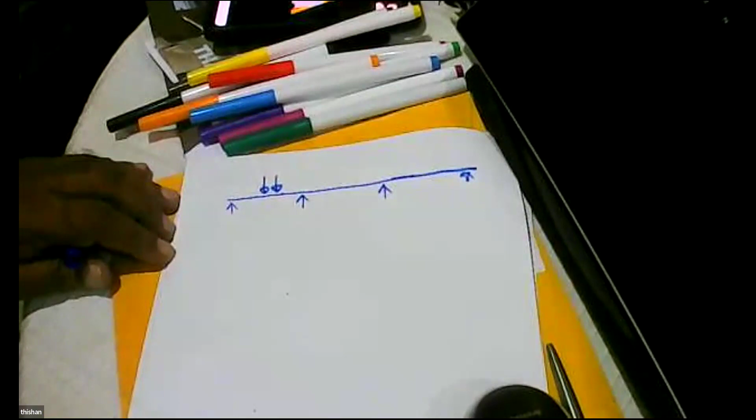So, direct shear. First question: why do you get direct shear? We have a member, a beam, subjected to two loads, W1 and W2, applied here. Where are we resisting? At supports A, B, C, and D - that's where we are resisting. So if you are applying a load here and resisting here, there should be shear. Call it shear.

So whether it's a UDL - you have a UDL - we must have the bending moment diagram. Whenever there is bending, what is the next thing that happens? We will have shear. And the shear force diagram goes like this.

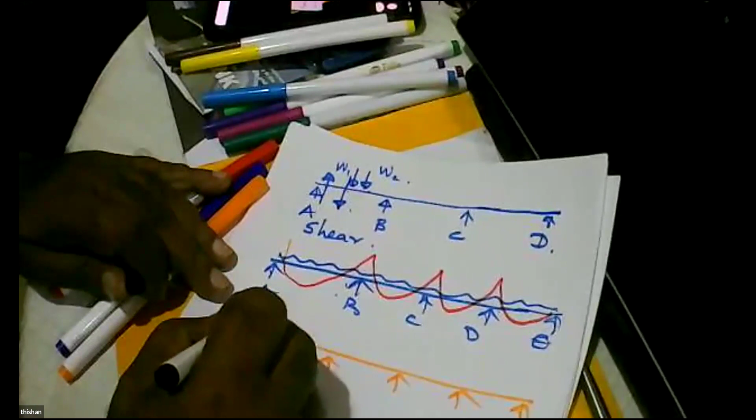And we approximately say the shear here cannot exceed 0.6 times F, where F is equal to L times 1.35 gk plus 1.5 qk - so the total load on a beam. It's so easy, you don't do any calculation - just calculate the total load on a beam.

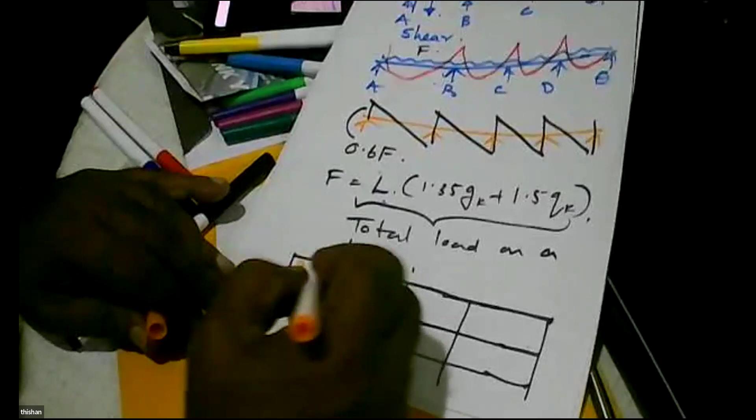If you have a building having a grid like this, and these are one-way slabs, where the load goes - this way, this is a plan view. So these are columns.

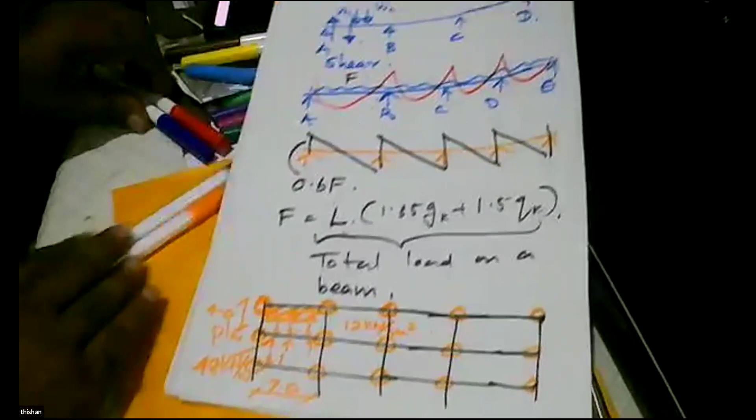So you know the load. If it's an office building, we say it's 12 kilonewtons per meter squared, and if this span is 4 meters, then 12 into 4. So this will be subjected to 48 kilonewtons per meter, multiplied by these spans which are 7.0 meters. So straight away we can see what's going on - we'll have a beam subjected to a load of 48 kilonewtons per meter. And what is the shear? Shear will be 0.6 times 48 multiplied by 7.0. Straight away we know the shear.

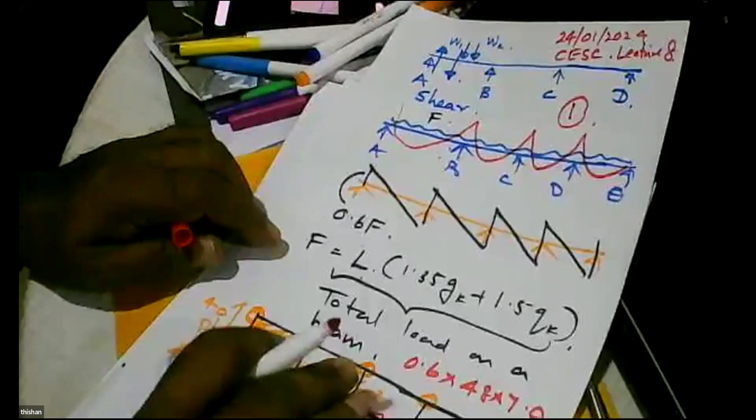So in British code, the approach was simple. Today is 24th January 2024, Civil Engineering Sectional Committee, lecture number 8, and this is page 1. This is clear - why it's 0.6? It cannot exceed 0.6, so we know the maximum. We know the load, we know the maximum. But this here comes where?

It comes at the support, where the support can be a 500 by 700 column. So in the British code, we drew it like this.

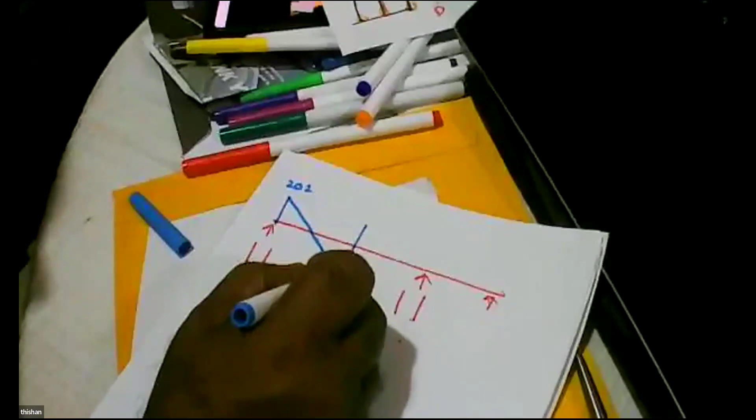So what is the value, Bandhuka? 0.6 multiplied by 48 multiplied by 7? 201.6 - 202, we say 202. So we say this is 202. Again, we go like this. Then there are two important sections - let's say we are using a 600 by 400 beam.

So there are two important sections. One is the face of the support. The other is d, simple d, away from the face of the support, so 545 millimeters away from the face of the support. So if I do an exaggerated diagram, a larger diagram.

So this is 250, this is 545, because here the d is 545. You know the reason, the cover is 35 millimeters. So we have this, so this is the face of the support. This d, away from the support.

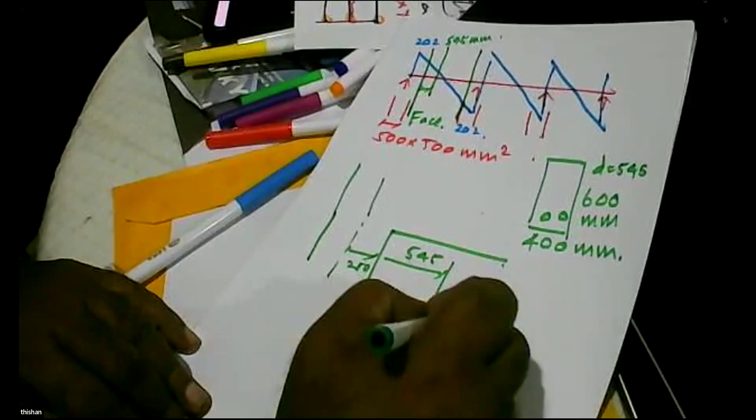Face of the support - why are these two so important? The reason is, if you take a section of a simply supported beam, this is the bending moment diagram, this is the shear force diagram. When the bending moment is 0, shear force is maximum. So if you take an element here, what do you get?

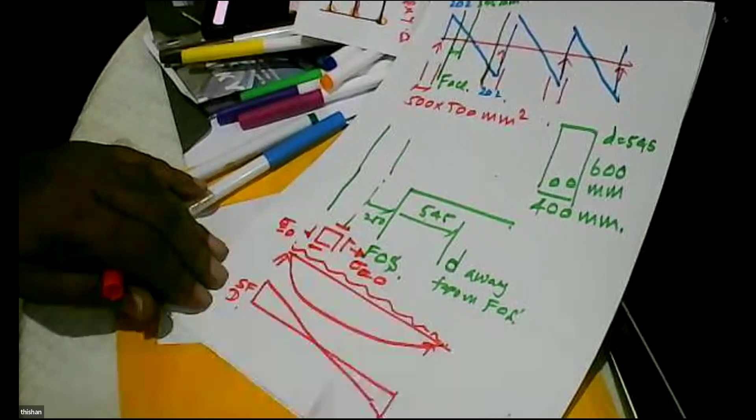Only the shear, complementary shear. Stress, sigma 0. So you can draw a Mohr's circle: 0, tau, minus tau, 0, tau.

And you find the principal stresses are like this: tension, compression. So what is the failure type? It's shear.

What is the shear failure? A crack like this, where the tension is pulling it, pulling it that way. So shear failure is a tensile failure, because this maximum stress that you get in the Mohr's circle will cause the shear failure, and it's a tensile failure.

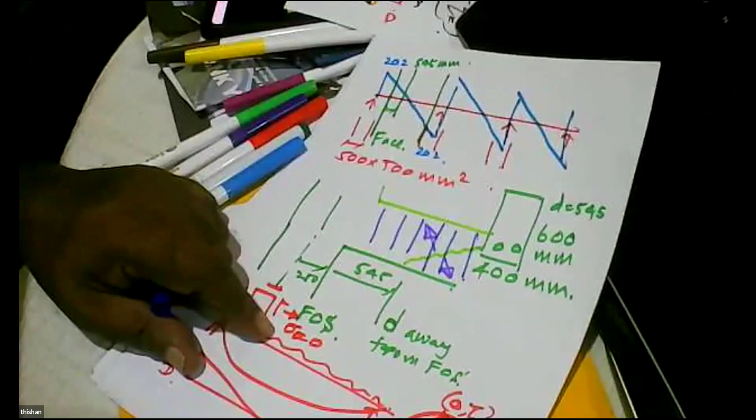So it's tension. So how to prevent this? Links like this. So tension is taken by whom now? Tension is taken by the links. So we provide links, and shear failure can be prevented. Shear failure is a tensile failure, and tensile failure means we have to prevent it using vertical reinforcement.

Vertical reinforcement should be properly anchored. So what we say is vertical reinforcement should be in the form of links like this - vertical reinforcement should be links, closed links, or this shape.

But we can have a closure. This is also possible, this is also possible, this is also possible. But this is called a torsional link. These are called shear links.

What is not possible? This is not wrong, but the new link bending machines, they give you this. So you can buy this, but ask a man to bend like this and make it like that.

And I generally keep this length as 10 times diameter of the link, because I would like to link it. So generally what you need is 6 times diameter, but generally I keep about 10 times diameter and bend. Is that clear? Yes, clear sir, very clear.

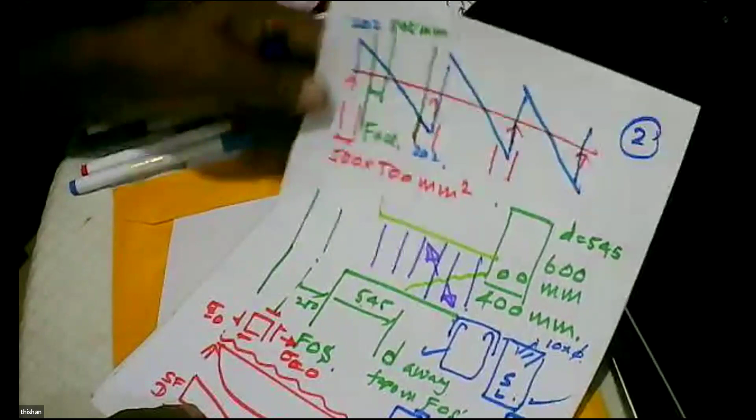Right, so that is shear, and we know the magnitude. And we can have two types of shear. One is you have a beam, no reinforcement, just these bars, no links.

Then who will carry tension? Concrete has to carry tension. How do you rank concrete - strong in tension or weak in tension? Very weak in tension. So all these capacities will depend on the dowel action provided by these reinforcements, so it's a function of 100 As over bd. The dowel action - more reinforcement, bigger the shear strength.

And then what else? Grade of concrete. Grade of concrete, and then the tensile strength. Generally this value is between 0.4 to 0.7 megapascal.

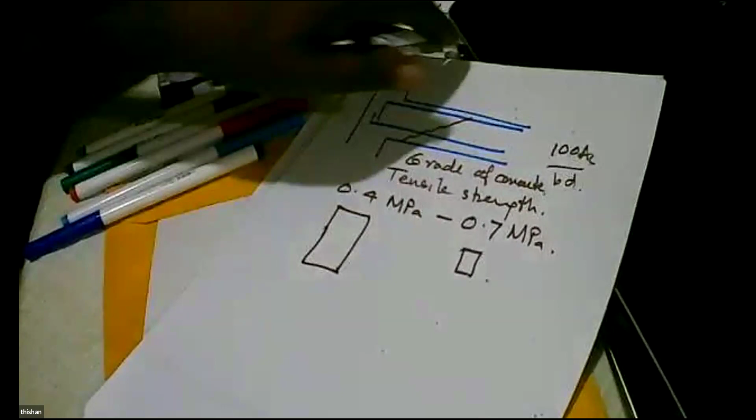So bigger the section, this side - big section, small section, this side. Bigger the depth, close to 0.4. So for most of my calculations, I don't bother to check the value, I simply use a value of 0.4, 0.45, not more than that, because the variation is so small to get any advantage. Most of the time you check the code and finally find 0.4 to 0.45 is the value that you get after calculation. So I just generally use 0.4.

So you have this situation, and then you can see we have links, properly reinforced links. What happens? We can have this compression here, this tension, this tension.

Who will provide the equilibrium? Compression. Who will carry the compression? Compression will be like this, carried by whom? Concrete.

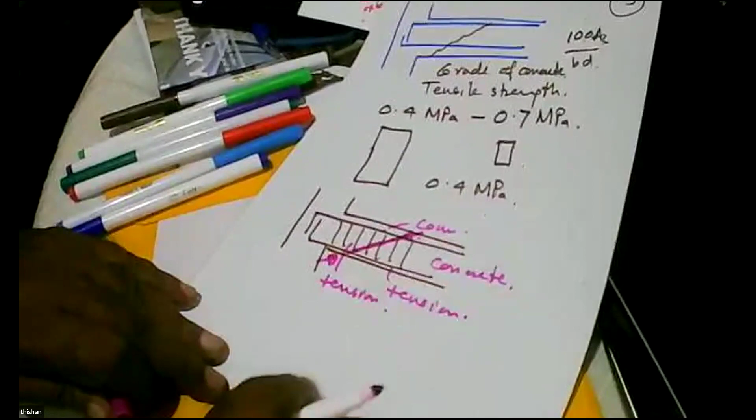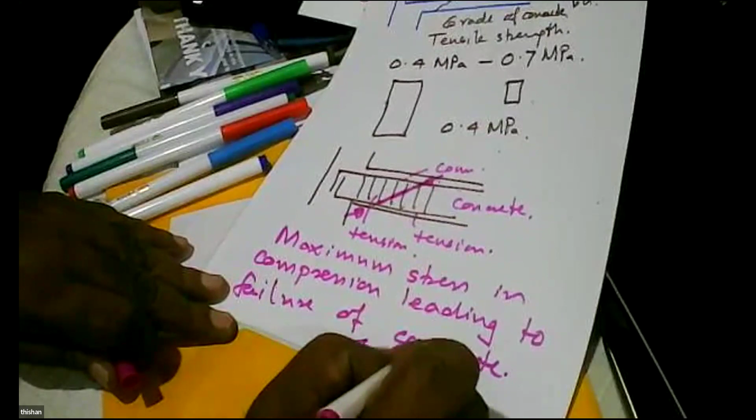But concrete is a very strong material, but it is not super strong, so there is a maximum value of stress in compression leading to failure of concrete. It's a maximum value, it's about 4.8 megapascal in BS 8110.

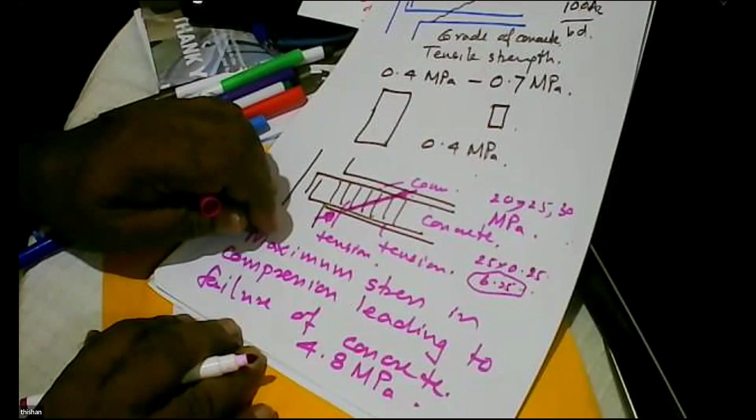Maximum is about 4.8 megapascal. Why? We use 20, 25, 30 megapascal cube strength, and the maximum stress that we can allow in compression induced by shear is only about 4, because if you use about 5, 25 into something like 0.25 comes to about 6.25. So with all these additional factors of safety, we say okay, we can allow a maximum value of 4.8, because when you use 25 cube strength, the actual strength is 20, 20 multiplied by 0.25 is 5.

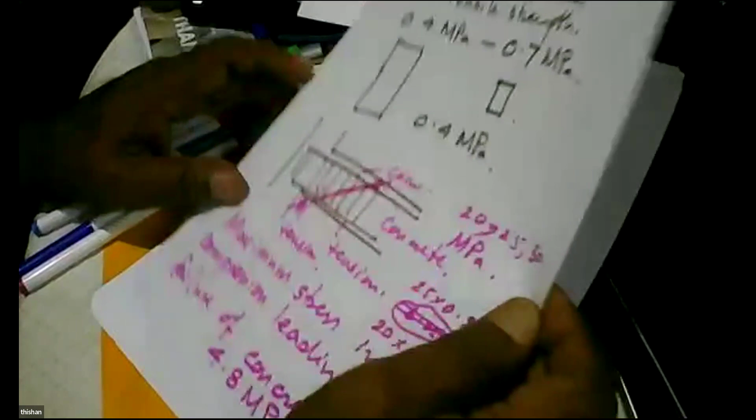So you can see generally the values vary between 4.8 to 5.3, so it's a very small variation. So generally I have a rule: maximum shear capacity is 5 MPa. If the maximum shear capacity is 5, minimum is 0.4, what shall I do? I generally select the section.

Shear, maximum shear at the support. So here is 202. Is that right, Bandhuga? 202. Yes, sir. 202.

Now I have to draw a diagram. So this is 7,000 center to center. Face of the support, 6,500.

So I have to say 3,250 divided by 3,500 multiplied by 202. What is the value, Bandhuga? 180. What is the value? 187.5. 188.

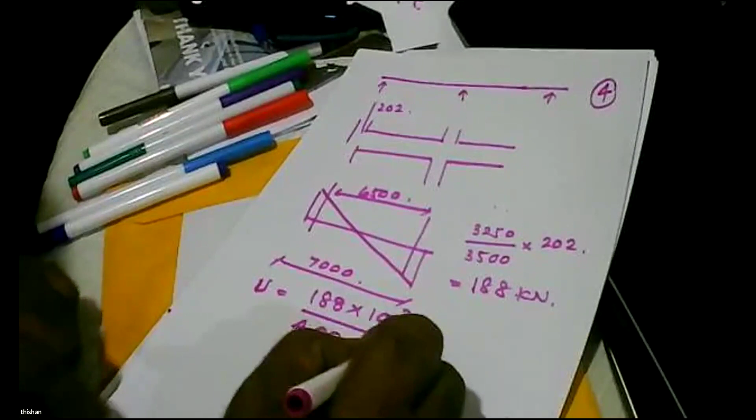Now what do I do? 188. Simple, V is equal to 188 multiplied by 10 to the power 3 divided by width 400. Let's calculate, start with 600 by 400 section. Yes, 600 by 400. Okay. 600 by 400 section. What is the value?

This is the shear stress, average shear stress. 0.862. 0.87. Okay. What is the maximum? Close to 5. Minimum is about 0.4. This is 0.87.

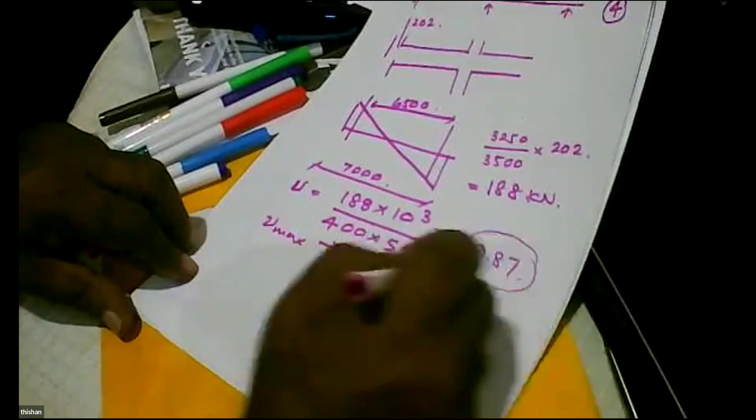How to provide links? Links are not provided here. We are going to check whether it can fail in crushing of concrete. So, stress is 0.87. What is the maximum? 5. Can it fail by crushing of concrete? No, it cannot fail by crushing of concrete. Why? Maximum is around 5. But at the face of the support, maximum shear is 0.87. Can it ever fail by crushing of concrete? Never.

Now we come to the next phase. Now for this, I'll say the effective depth is 550. So here we have 250, another 550, so that gives 800. Then I'll say V is equal to 100, 202 multiplied by 2,700 or 3,500 minus 800 divided by 3,500. What is the value, Bandhuga?

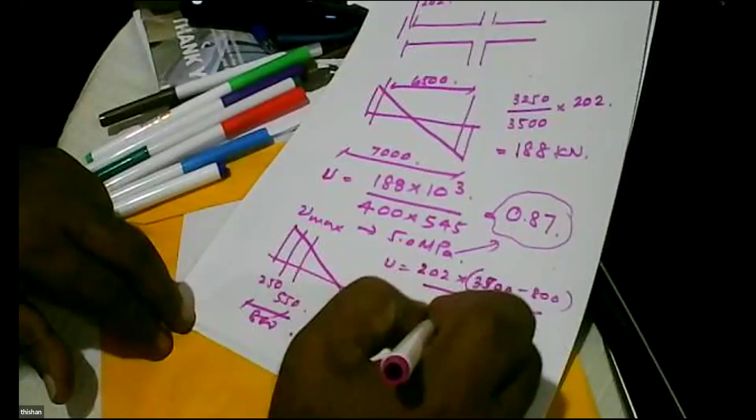155.82, 56. So yes, simple V is equal to 156 into 10 to the power 3 divided by 400 multiplied by 545. 0.715, 7.

Then we look at the BS formula. It says ASV over SV B, V minus VC, 0.87. Yeah, very simple. Okay, very simple.

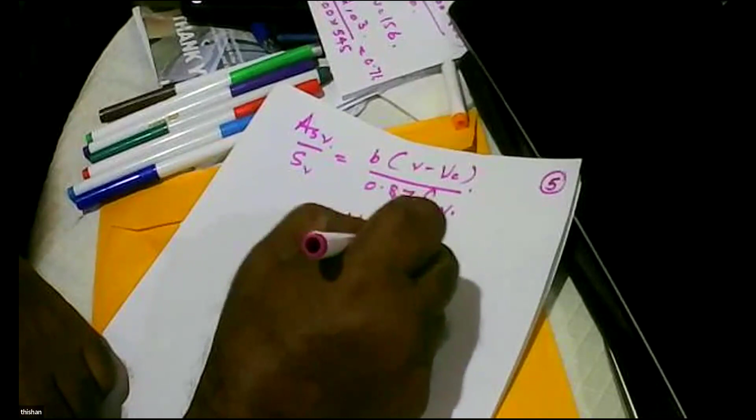Now, what would I do? Now you can see here we have a term called V minus VC. Now if V is 0.45, VC is also 0.45, what do you get? 0. Then you get infinity. That is not good, you can't get infinity for the link spacing. Because this is 0, it goes there, you get SV as infinity. Can't be. So then it says V minus VC should be greater than 0.4.

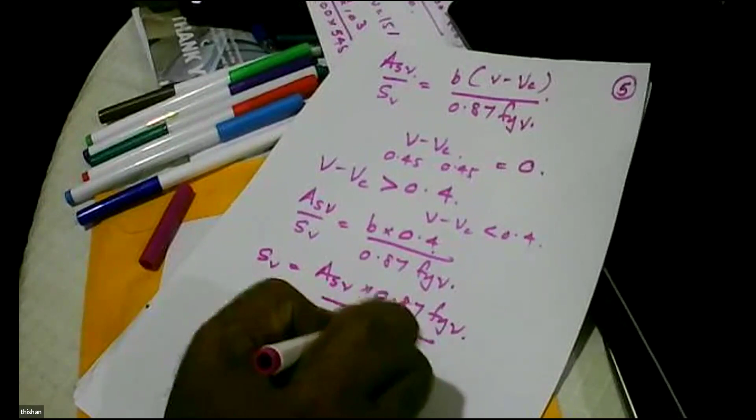So anything less, if V minus VC is less than 0.4, we say ASV over SV is equal to B times 0.4 divided by 0.87. And we call this spacing SV is equal to ASV times 0.87 FYV divided by 0.4 times B. And in this equation, ASV means if you are using 8 millimeter bars, 50 here, 50 here, ASV means 100 millimeters square. Got it? Yes, sir.

But ASV is known, SV is equal to 100, 0.87 into 500, divided by 0.4 multiplied by breadth. What is the answer? 271.87, 200? 271.8, 200. 271.8.

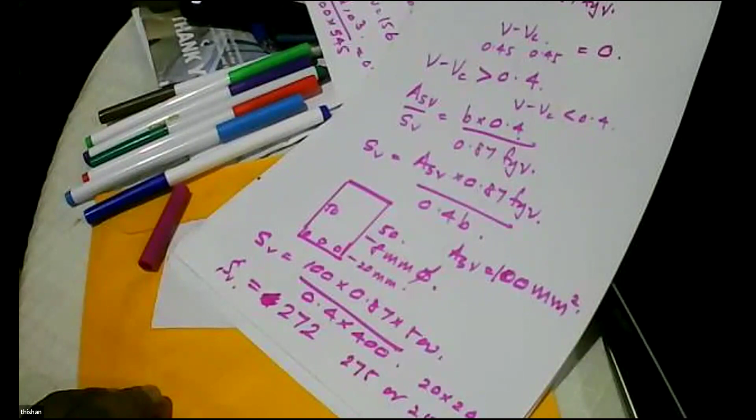And if you are using 20 millimeter bars here, Eurocode allows you to use 20 times 20, 400 millimeters. But you can't go for 400. So you might select 275 or 250 for the next. I would select 250. Why? Because I would like to have little extra reinforcement to assure that overloading can be tolerated easily. Why? I like a failure in flexure. I don't like a failure in shear.

What is the reason? If a beam fails in flexure, what can you do? You can bring a steel plate and fix the steel plate at the bottom of the beam. Now the beam will be okay after jacking the beam. On the other hand, after jacking the beam, you will use FRP treatment, fiber reinforced polymers, carbon fibers. What will happen? Beam will be okay. But if there's a shear failure with diagonal cracks, very difficult to repair. So because of that reason, I don't mind being a little generous with shear links close to the supports, not elsewhere.

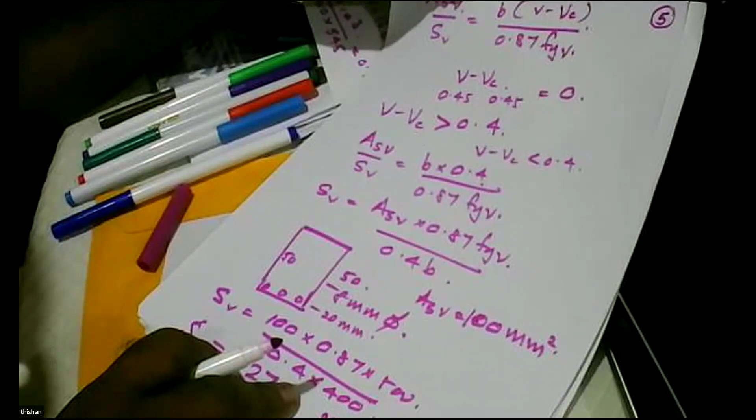Now let's assume that beam has been overloaded by somebody and we are getting a load of 312. Now what is V? 312 into 10 to the power 3 divided by breadth 400 divided by depth 700, 545, and you got the answer will be 1.42. Is that right, Badhuga? Yes, sir. 1.4. Now we have to substitute.

Why? In the first equation, ASV over SV is equal to V minus VC over 0.87 fyv. And now ASV is 100, SV breadth 400, V minus VC.

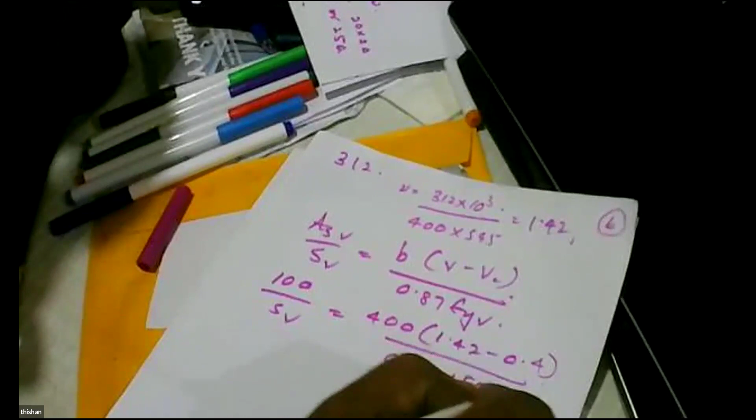So which means it's better to use 10 millimeter H10 bars, and for H10 the spacing will be 61 into 50, 78.5. For H10 bars the spacing will be more. So how much do you get? 150? 167.3.

So what are you going to do? We're going to do this. We are going to calculate small v as 0.4. Capital V is equal to 0.4 multiplied by how much? 400 multiplied by 545. What is the value of V?

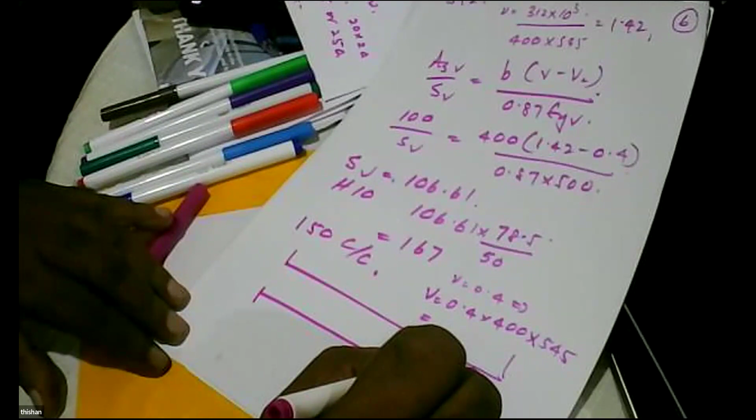So this is what the nominal reinforcement can carry. How much is it? 0.4 into 400 multiplied by 545, into 10 to the power minus 3. How much? 87.2, 80? 7.2. 80.

And then there will be another section where it's 87.2. So what are you going to provide? Here, H10 at 150. Here, H8 at 250.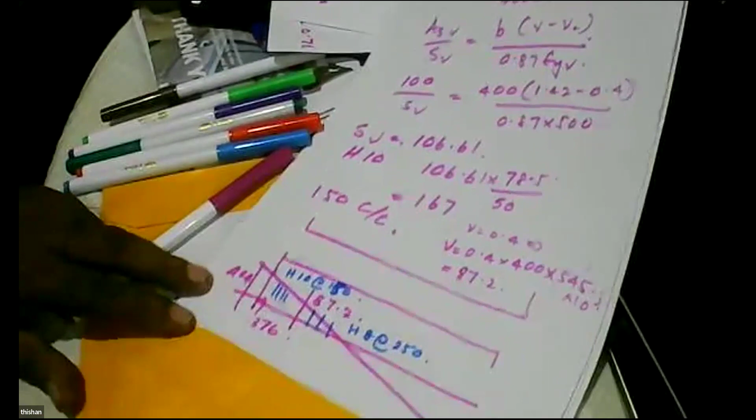So you can decide where you are going to provide nominal links, where you are going to provide design links. So here, design. Here, nominal. Is that clear, Manduga? Yes, clear, sir. When the shear force is low, we can go for nominal links. When the shear force is high, we must design the links.

So in BS 8110 method, we say we are using a truss analogy. Truss analogy. What is a truss? Beam is like a truss. So what is the purpose of this? Compression along with concrete. What is the purpose of this? Tension. Like a truss. But truss cannot be like this.

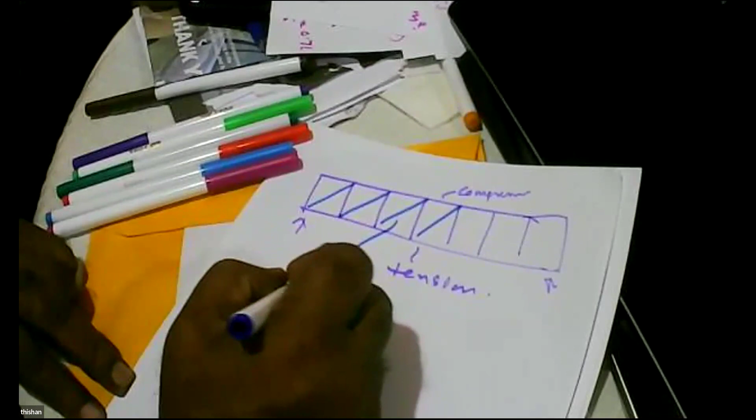You need diagonal members. So what are the diagonal members? Compression. Concrete. So in reinforced concrete, the diagonal members are out of concrete. Is that clear, Bandhu? Yes, clear, sir.

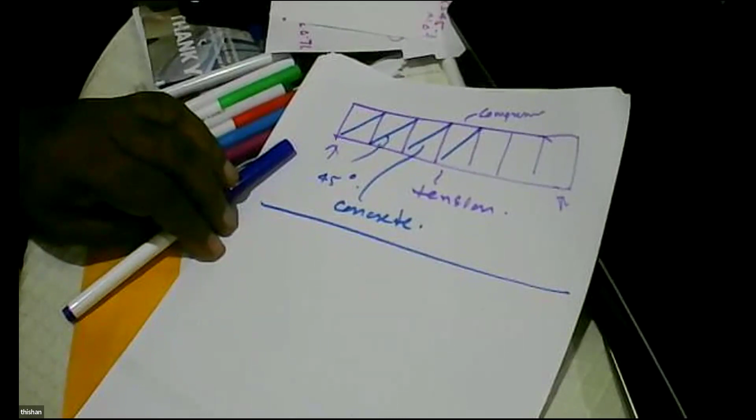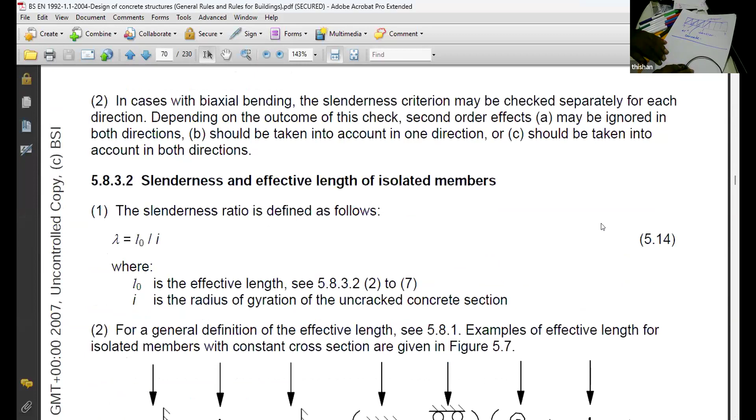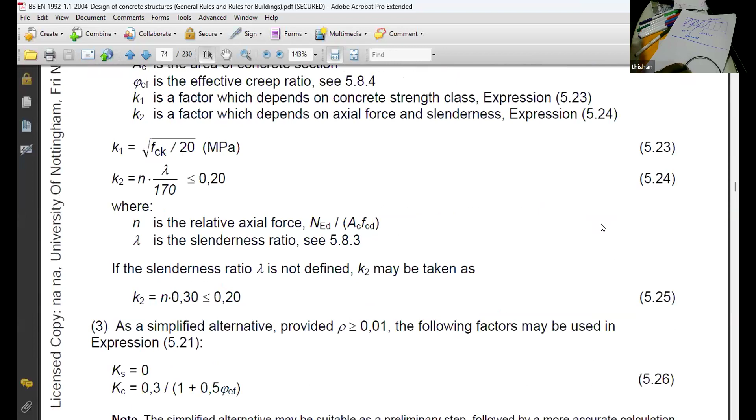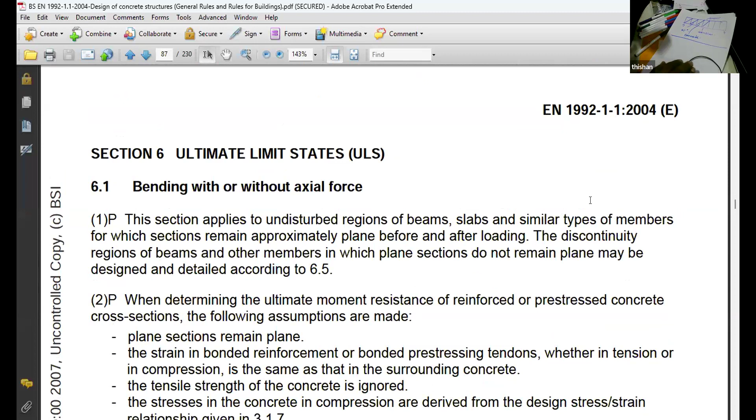Okay, now we come to the design. Under section 6, bending with or without axial force. The assumptions are plane sections remain plane. The strain in bonded reinforcement, whether in tension or compression, is the same. Tensile strength of concrete is ignored. Stresses in concrete in compression are derived from the stress strain relationship.

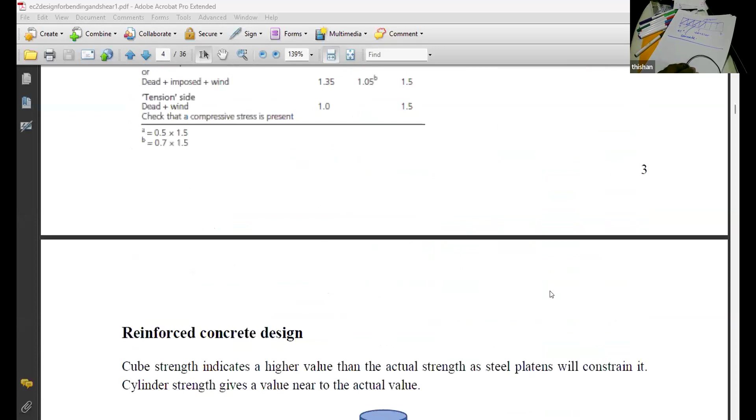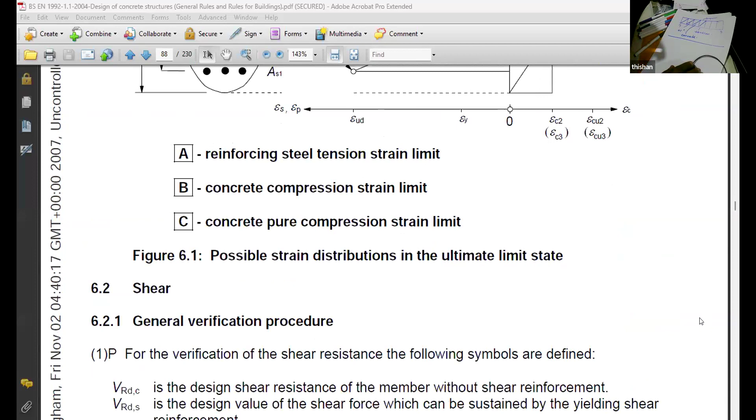And then it says shear. Flexure is very simple, but it doesn't give equations. So for flexure, we have derived equations. That's what we did last time. When I said no need for equations, shortcut methods are available. Also available.

Then this talks about VRDC, the design shear resistance of a member without shear reinforcement, based on the 0.4, 0.45 value. VRDS is the design value of shear force which can be sustained by yielding shear reinforcement. That means VRDS is with shear reinforcement. VRD max, can you remember I told you 4.5 to 5 range? Yes. VRD max is 4.5 to 5 range. This is what you get when you have reinforcement. And this inclined portion is for pre-stress concrete, so you don't have to worry.

VCCD and VTD are pre-stress concrete terms, so you don't have to worry about them because we are dealing with RC design. So for RC design, the shear member reinforcement VRD is equal to VRDS only.

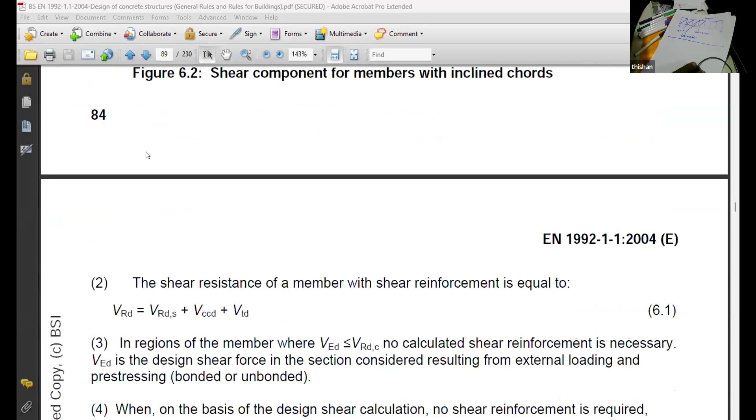And if the regions, VRDC, what is VRDC? That is the shear resistance of a member without shear reinforcement. Can you remember? I calculated the nominal link area. That refers to nominal link area. So VRDC is for nominal links.

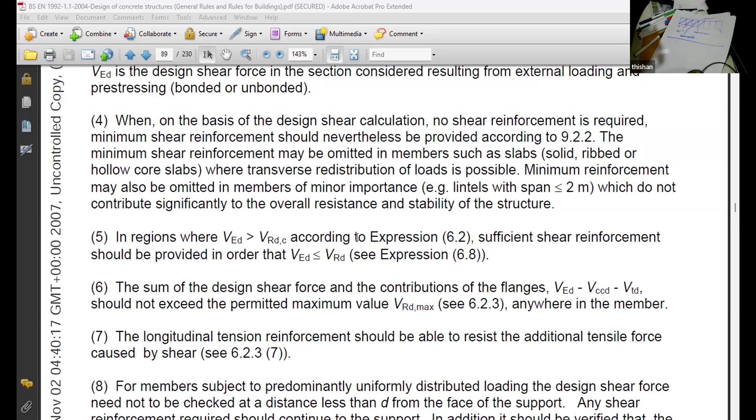Then it says when no shear reinforcement is needed, still you have to provide the minimum shear reinforcement. That is given in section 9, where all minimum values are given. In regions where VED, the actual design shear force, is more than what can be carried without links, then you must provide shear links. To calculate VRDC, it gives an equation with a minimum value.

There are big equations, but what is the value you get finally? Around 0.4 or 0.45 times the cross section. All these are big calculations, but the important thing is if you have pre-stress, you can get a higher value. So in this equation, one part is the pre-stress part, and the other is the RC part. The RC part comes first, the pre-stress concrete part comes next.

Is that clear? Yes. But whatever you do, what is the answer? Around 0.4. So you can do any calculation, but the answer is around 0.4. That's how you create rules. The moment you do that, your calculations become very simple, because there's a big equation given, but the answer is around 0.4.

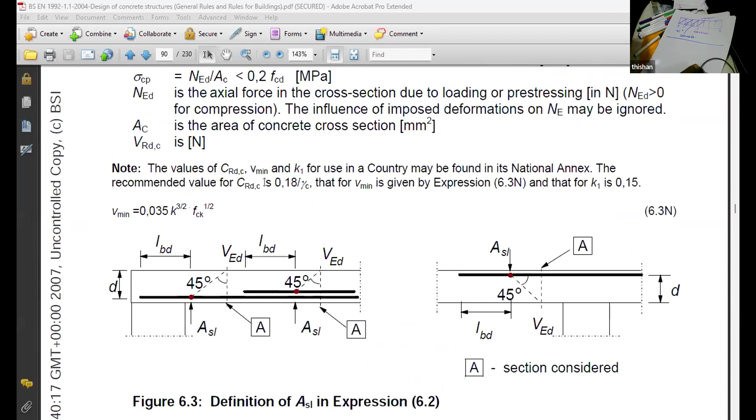Then there are so many other things. This is a pre-stress rule, so we ignore it. Then there are other parameters. Doing all the complicated things, finally it says, if you want reinforcement, the reinforcement requirement is given by...

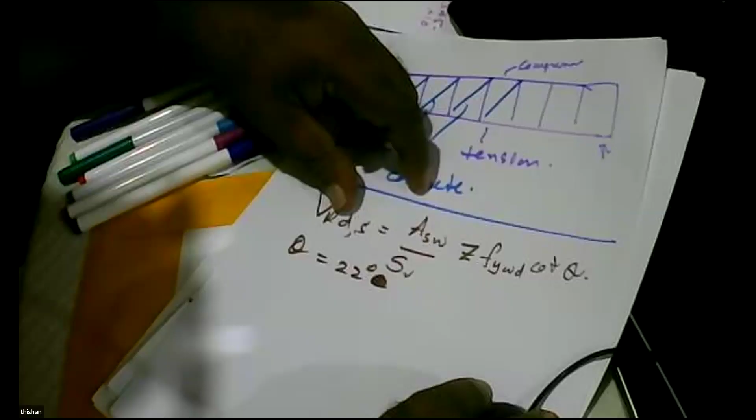VRDS with shear links is ASW over SV, Z, FYWD, cot theta, where theta is 22 degrees. Cot theta, can you see this equation? Cot 22 is equal to 1 over tan 22. What is the value of 1 over tan 22? It's 2.47, so generally it's called 2.5.

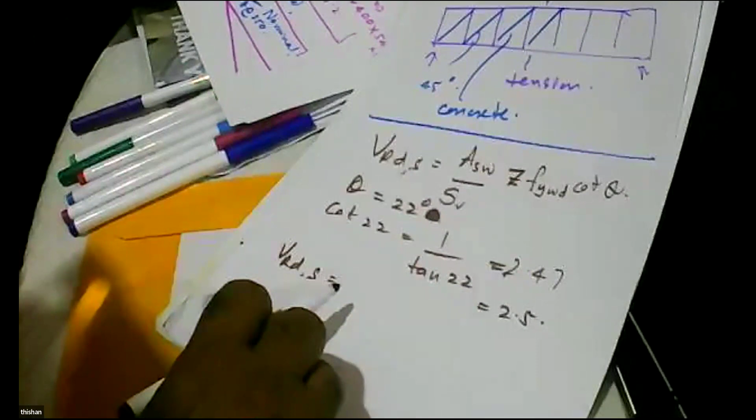So VRDS is equal to ASW. Shall we use the value we got? What value did we use in the last example? We used VS 312, so let's say this 312 into 10 to the power 3. ASW is 78.5 into 2, 157, SV - we don't know, we'd like to find it.

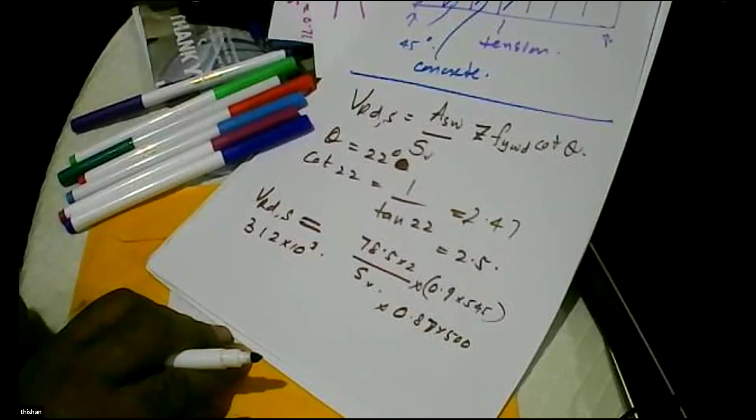Is it 0.9 times D? If you see Z in any equation, Z means lever arm. Lever arm is considered as 0.9 for shear calculation, multiplied by 0.87 multiplied by 500 multiplied by 2.5. But then what is the SV value? These 157 multiplied by 0.9 multiplied by 545 multiplied by 0.87 multiplied by 500 multiplied by 2.5, divided by 312 into 10 to the power 3.

What is SV? 268.41. Can you remember British code gave a lower value? Yes, British code gave 150, 167. This gives slightly higher, so Eurocode is more advanced in shear design. But in Eurocode also we have only one equation.

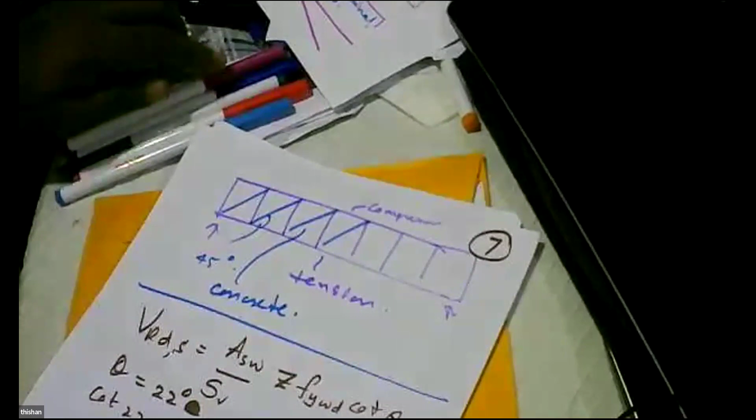And that equation is given in the code. Then you've got to ask, what is this theta? What is this magic theta? How do you get theta? That's where the complication is, otherwise finding the shear reinforcement using Eurocode needs only one equation - equation 6-8. Straight away you can find it. Very easy.

So many people say shear design is a nightmare. No, it's not a nightmare. Then what is the speciality? What is this theta? That's where the complication comes. It says when the concrete fails in crushing at the face of the support, theta can be less than 22 degrees or theta can be between 22 and 45.

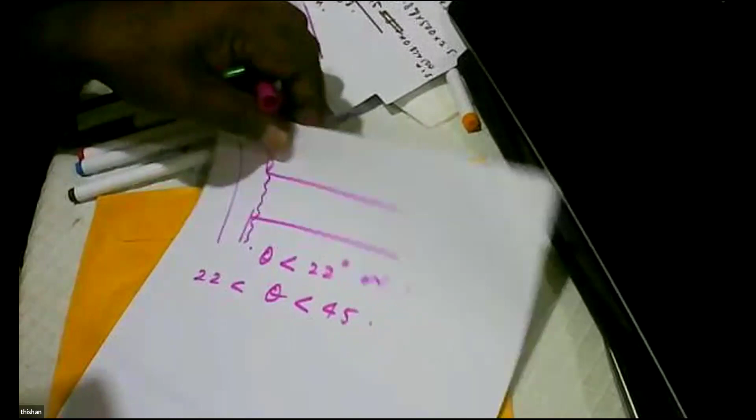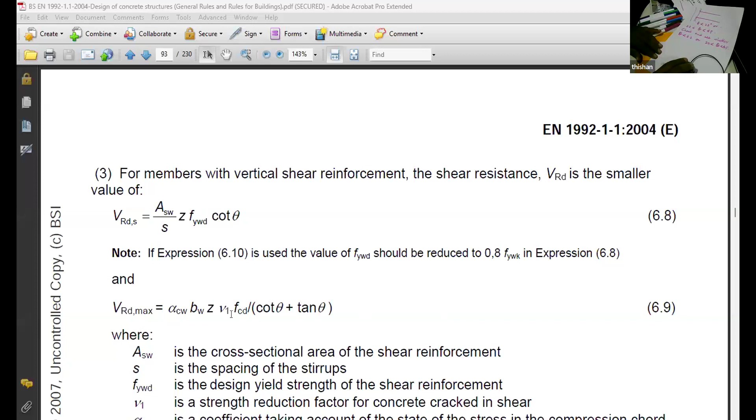What it says is, check and see whether theta is less than 22 or theta is between those values. How do you achieve that check? For that we look at the code. This says VRD max is given by some equation, equation 6.9, and it's a big equation.

Alpha CW, BW, Z, nu one, FCD divided by cot theta plus tan theta. A big equation.

The big equation. So, how are we going to deal with it? First, assume theta is 22.

Substitute in this one, and alpha CD, alpha CW is equal to 1 for non-prestressed concrete structure. Alpha CW is 1, okay, good news. Alpha CW is 1. BW, we know 400. Is it 0.9D?

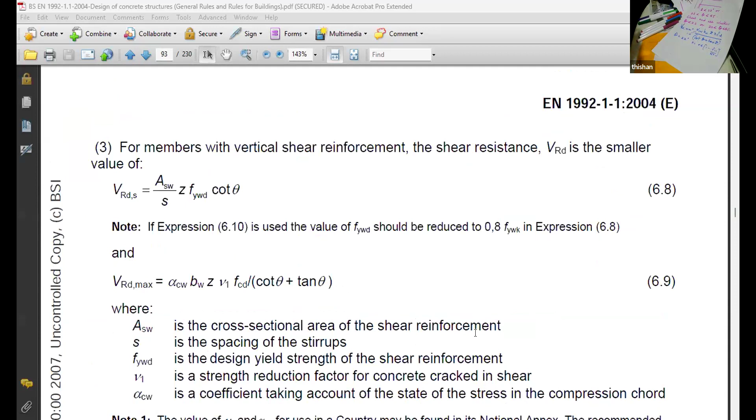The strength reduction factor for concrete cracked in shear is given by this equation, the equation I have shown. FCD is FCK divided by gamma m, or FCK divided by 1.5.

So now you can see the whole equation is here, the values are here. What shall we do? Substitute. VR max with angle as 22, 1.0 into 400, into 0.9D, 545,

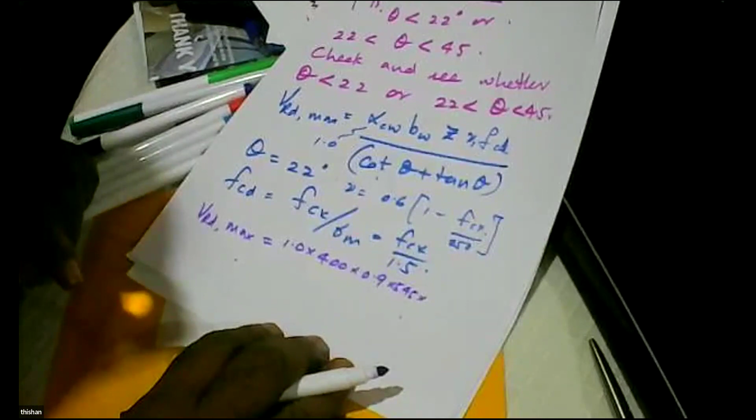multiplied by nu one. So that is, we are using 30 megapascal concrete. So this comes to about 0.53. This 30 divided by 250, so it comes to about 0.88 multiplied by 0.6, about 0.53.

And 1 over tan 22 plus tan 22. 1 over tan 22 is about 2.5, 2.47. Tan 22 comes to about 0.4, I think.

So what is VRD maximum, Bandhu? What is VRD max? Multiplied by 10 to the minus 3. So what is the value? 36.117. Can't be, it has to be more. It has to be something like 400, 500. It's a big value.

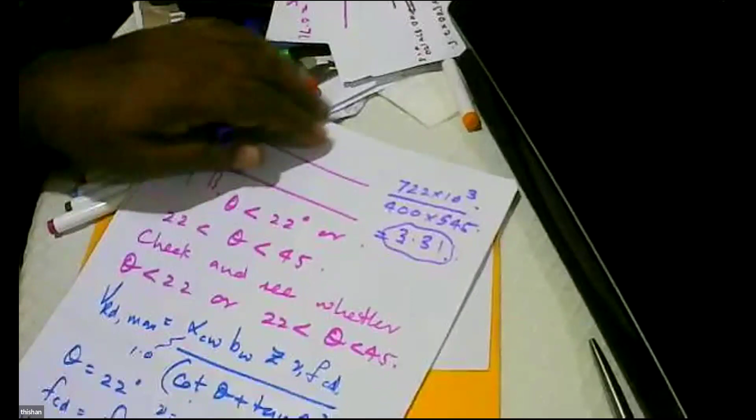Can you remember the magic number? 5, 4.8 and 5. So what it says is, if the shear stress is 3.31, angle is 22. If it is close to 5, 3.31... if it is close to 5, what is the angle? 45.

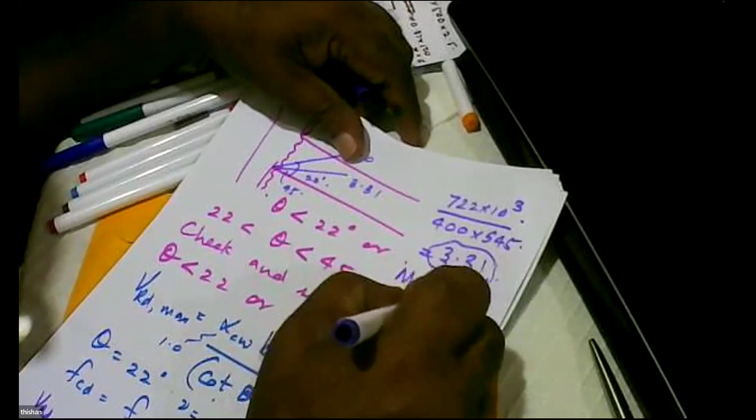So how can I avoid all these extra calculations of finding the angle of shear failure? What I do is, I make sure the maximum shear is less than 2.5. So how can I control the maximum shear stress? Because I am the guy who selects the width of the beam. So if the shear stress is too high, I increase the width of the beam. And I keep the maximum shear less than 2.5. So do I worry about the angle then? Angle is always 22. Got the point?

Now if the angle is more than 22, that means if the shear is more than around 900, 850 or 900, what will happen? Angle will be more than 22. Because I am moving, it can vary between 3.31 and around 5. The shear stress maximum can vary between 3.31 and 5. So what shall I do? I will keep the maximum shear stress less than 2.5. Then what will happen? I don't have to do any calculation because the angle is 22 anyway.

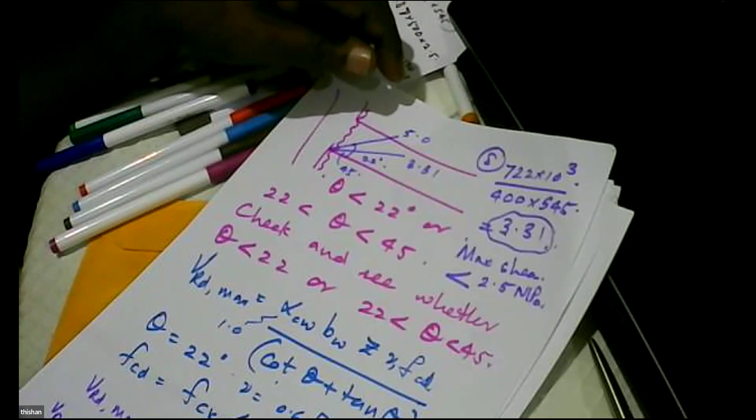Got the point, Bandhu? Yes, sir. Because if the shear is high, I have to find the angle. Why should I bother to find the angle? Because I am in control, I am the guy who selects the width of the beam. So I select a bigger width and keep the shear stress down. Can you understand it? Yes, sir.

So when I'm selecting the general arrangement drawing, how could I do that? Okay, I have a building heavily loaded. Say we said 1.35 GK plus 1.5 QK is around 20, a warehouse. And these beams are also, let's say, one way, 9 meters long. And so these are about 5 meters, 4 meters. These are 9 meter spans, 4 meters, heavily loaded.

20 into 4, 80. 80 into 9, 0.6 times 80 into 9.0. What is the value? Big shear.

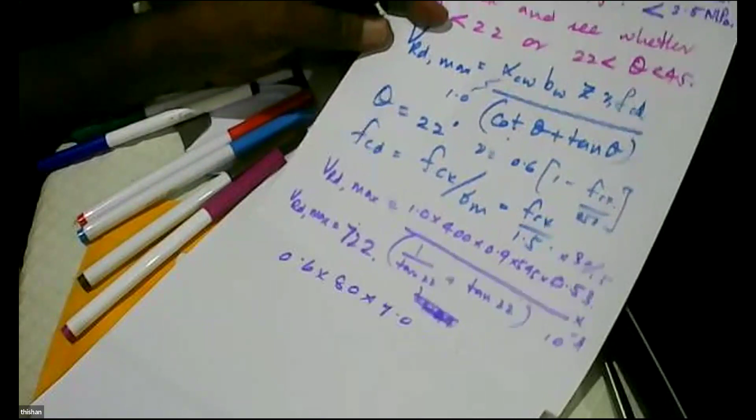432, still it's less than 720, still it is less than 722. Will I have a problem? Less than 722, will I have a problem? I don't have a problem. Why? Because you can see in most of the cases, 99%, what is the angle theta? Less than 22 degrees, so it is 22 degrees.

Got it? Yes. Now I have shown a very long beam, 9 meters long, heavily loaded, 20 kilonewtons per meter square. So each beam will carry 80 kilonewtons per meter. Still it's not possible to reach this around 3.3 value. Shear capacity is 720.

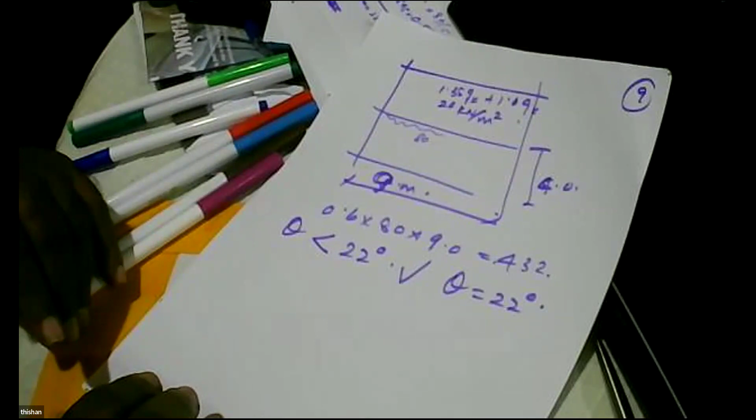So there's no way you can come there. So in Eurocode, don't worry. What is the way? Select a width so that shear stress at the face of the support is less than 2.5 megapascal.

When you do that, theta is 22. Is that clear? Yes sir, very small. You are the person who draws, the general architect or the engineer. Engineer draws, so engineer can do a simple calculation and make sure the shear stress remains less than 2.5, so your angle is 22, and you don't have to do any complicated calculation. In textbooks, shear is a big mess, huge calculations, but you don't have to do it.

Why? Because we go around it and we make sure shear is the value that I want, not what the code wants. Code has covered all the possible scenarios, that doesn't mean I have to calculate all the possible scenarios. I'm the design engineer, I decide what I'm going to do. So I decide I'm going to select a width large enough so that the maximum shear stress at the face of the support will be less than 2.5. Definitely the angle will be 22. Got the method?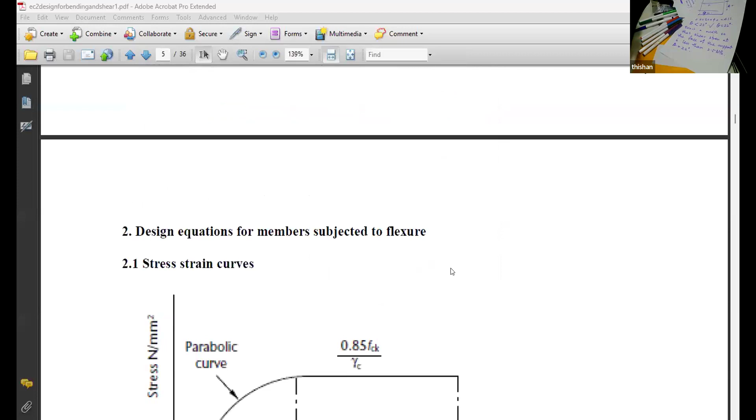So if you look at Mosley and Bungey, any book, even the design example I have given, because I have to cover all the possible scenarios. So the design example, even in the design example, I have covered it in great detail, considering all different scenarios. And so you can see a lot of big equations. But don't worry.

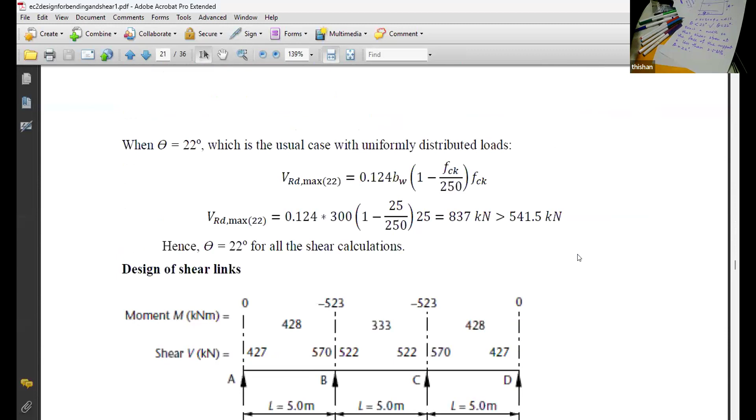So I have given a complete example with the flexural part of the example, then this is the shear part of the example, and so at each support, the calculations are given. Then these equations are given, the minimum ratio equation is given, yeah, under section 9. Big calculations, but then I'll also look at the simplified.

Just one moment. Okay sir. Till I get the note. Let's see. Yes.

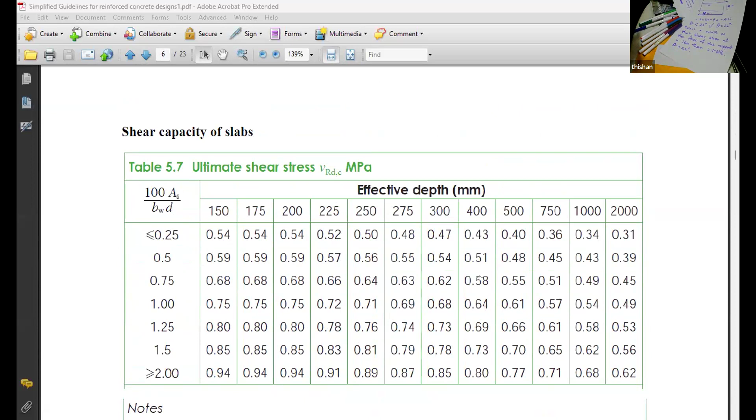See here. So all those values are available as tables, so you don't have to actually calculate. Ultimate shear stress, so I told you it varies between the 0.4 range, but we have shared these notes, yeah, these values are there. So likewise, the simplified formula is available.

So what is the difference between Euro and BS? BS code gives this table in the code. Eurocode gives one equation, it says if you want, you can. So that's why the advantage is you can make use of these simplified tools.

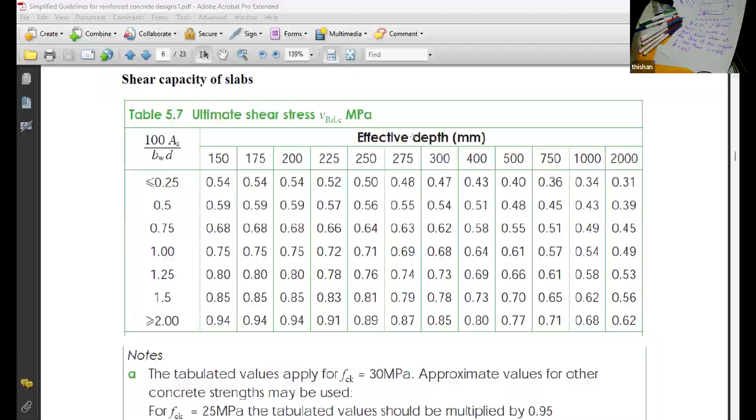So Panduka, any questions on this? There was one question. What is it? Can we enhance the shear capacity if we can provide proper anchorage to longitudinal reinforcements? No, actually that's something different, it comes in slightly different way. I'll share the screen, I'll show you.

That means you must provide some longitudinal reinforcement to provide the equilibrium. So don't just get a lot of reinforcement when you are doing the shear design according to Eurocode. You have to be a little careful when you are curtailing the reinforcement. So generally, when you are curtailing, in the early days we used to have the hanger bars as the smaller reinforcement, and additional reinforcement used to come in the middle. But that is not the practice we do now. Now we run the larger bars as hanger bars, and then we provide smaller bars as additional.

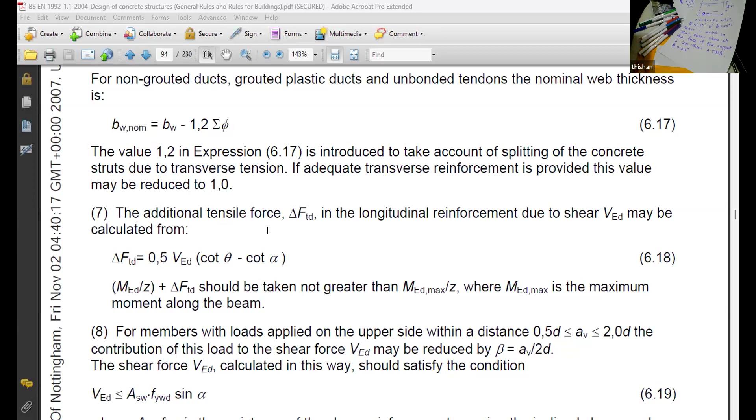Got it? Yes. And then when you go to section 9, it says the minimum reinforcement. Section 9 is all about minimum reinforcement. Here you get it.

The reinforcement ratio for shear is given by this, alpha is 90, sin alpha is 1. And then the minimum ratio is given by this one. So there's a minimum longitudinal reinforcement - sorry, the minimum shear reinforcement. There's a minimum, it's a minimum.

Okay. Right. Just give me 1 minute, I have to open the door and come. Okay, sir.

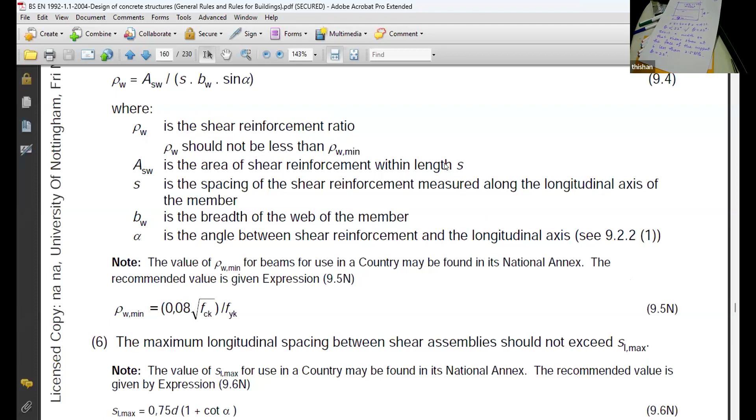So Panduka, now I have given a design example. This design example is very complicated. If you are interested, you can have a look, but this is the crux of the matter. For completion, I have given one example in the note, and you can see all the calculations very clearly given in the example. But there's a small mistake in the example.

In this formula, there should be a value of D. D is missing - the depth should be 600, 545. You have to multiply it by 545, but here I have not multiplied it, so there's a small mistake here. Other than that, this note is perfect.

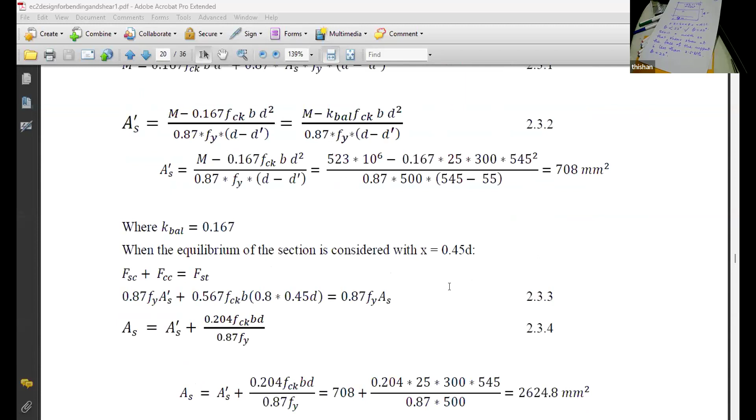So if you go through this example, you can learn a lot. Take your time, go through it, but be aware that there's a small mistake here because I have forgotten to multiply it by D. The equation has D, the effective depth, but I have forgotten to multiply it by D. So just be aware of that. Other than that, it's perfectly done - all the examples, everything is there.

But the method that I have taught you is far easier than the method given here. The reason is the code, the basic books like Mosley and Bungey, they are trying to cover everything. But I have shown you how to avoid all the trouble.

What is the trick? When you are selecting the width of the beam, we make sure the maximum shear stress is around 2.5 or less. Then the angle is 22 - whatever we like, whatever we try to do, the angle will be 22. But if the shear is high, the angle can vary between 22 to 45.

That is the unlikely case, because when I am designing, I don't like shear to govern. Why? Shear failure does not give enough warning. How about flexural failure? It gives a warning. So I like beams to fail in flexure, not in shear. So I make sure shear capacity is excessive and flexural capacity is sufficient.

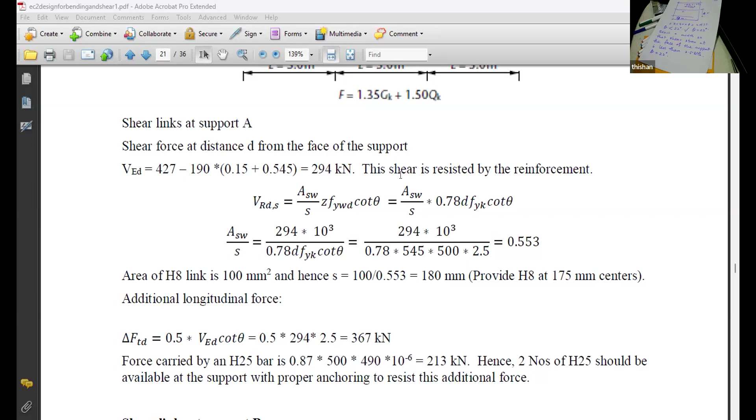So Bandhuka, there's a question. How can we apply retrofitting methods to shear failures?

That's a good question. If a beam has failed in shear, you better check why it failed in shear, because generally shear failures don't happen. If you have seen a shear failure in a structure, be very careful, because something is really wrong with the design engineer. If the design engineer has been vigilant, there cannot be shear failures in structures. And retrofitting, what is the method? Very simple.

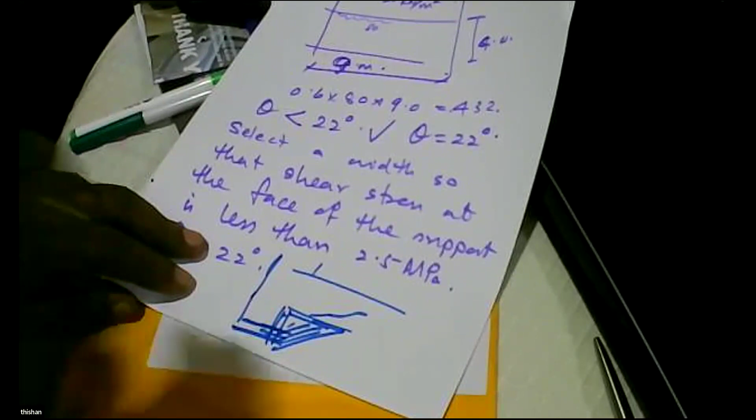You have a column, you have the shear failure. You fix a steel bracket here, using pre-stressing type bore rods. Fix it, support it here. Now where the shear failure occurs, be away. By the time you come to that place, the shear capacity, shear stress will be much lower.

Could you understand the method, Bandhu? Yes sir, that is clear. Very simple, because shear failure always occurs away from the surface of the support. So you change the face of the support by having a steel bracket. Got it? Got it, sir. Yes sir.

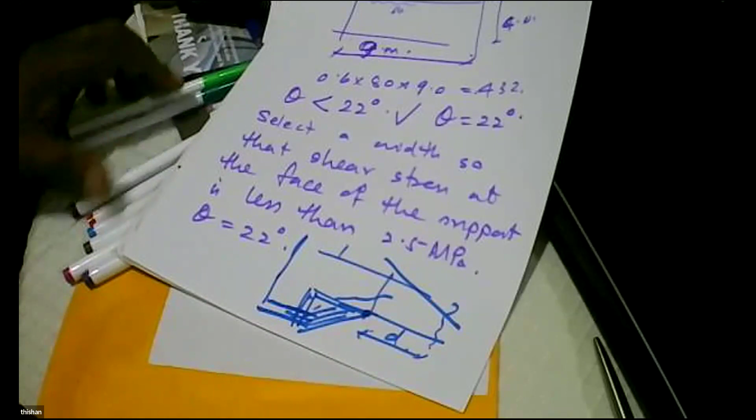Be more careful, because shear failure for a design engineer would be a nutty case. If the design engineer is a good design engineer, he will never allow a shear failure to happen. He will always make sure the shear width is sufficient and shear failures never happen. The links are all there, so those are cheap. But he will make sure if the beam ever fails, it will fail in the middle due to flexural overstress.

Okay sir. And one last question, sir. One member has put a sketch into the chat box. If you can see it, sir, they're asking about the shear link shape which is in Indian standards.

This is wrong. You have to have a hook. This is wrong. This is the correct one. No? You put this one, put a bar there, then use a cross. So this is a standard link.

Where these bars are properly placed, you don't have to cross every one. After about 3 or 4, you can cross. What is drawn is a wrong diagram. You can't have shear links like that.

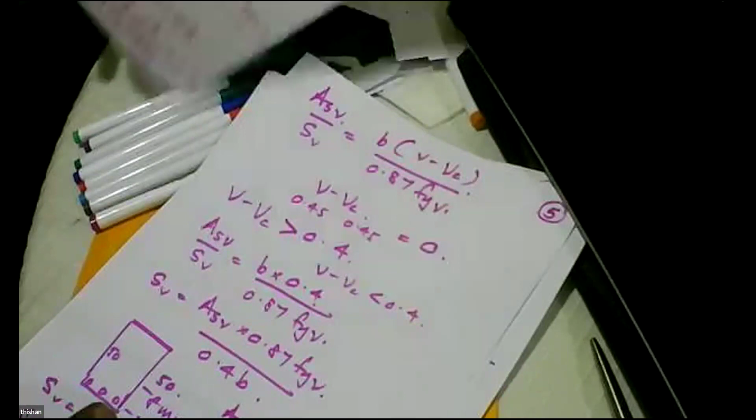Which are not... I don't encourage people to design shear governed designs. It should always be flexure governed designs. So with shear we will be generous, and we can easily be generous. Even locally we can make the beam wider. So don't go for shear governed designs, always go for flexure governed designs.

Okay, and how about our next session? It is a continuation - the next day, now shear is covered, bending and shear. Then we'll need to look at columns, and also torsional shear. Shall we cover torsional shear also at the same time? Okay, then it's good, because then shear is completely over. So next time we'll talk about torsional shear.